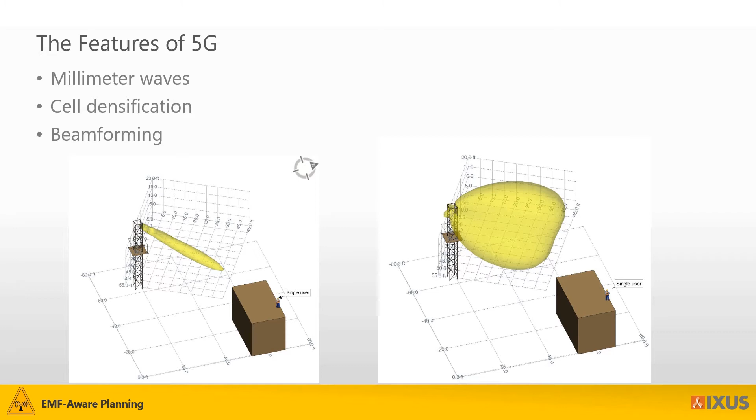At IXUS, we have an antenna service providing models of the highest possible quality. We have a team of antenna engineers specialized in the creation of antenna models. We use data sheets, pattern files, or any available information. Antenna models are reviewed and verified using a formal traceable process. Every version of our antennas published to our antenna database has a verification document available.

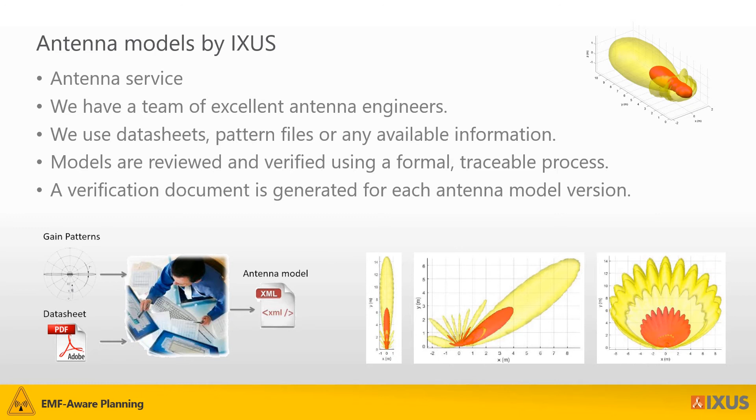5G antenna modeling has received special attention the last few years to ensure we capture the dynamic beamforming nature of these antennas accurately. Our IXUS antenna engineers use traffic envelope data patterns obtained from manufacturers together with a ray tracing approach to produce a model that accurately captures the beamforming nature, as shown on the bottom right.

Something to note here is that we can also model a particular beam set or configuration of the 5G antenna if needed. Incorporating specific power scaling settings is possible, and an example will be shown later on.

Exposure-aware design. How do you make sure your future sites are compliant? You add the compliance step into your workflow and as early as possible. If you are responsible for the compliance of the base station, you need to make sure that you gather enough information early on.

What is the most important thing to remember when planning where to install your 5G antennas? We recommend that you don't intrinsically assume that your base station would be compliant when installing beamforming antennas at the same height as other antennas, especially if the zones were already close to being over the limit.

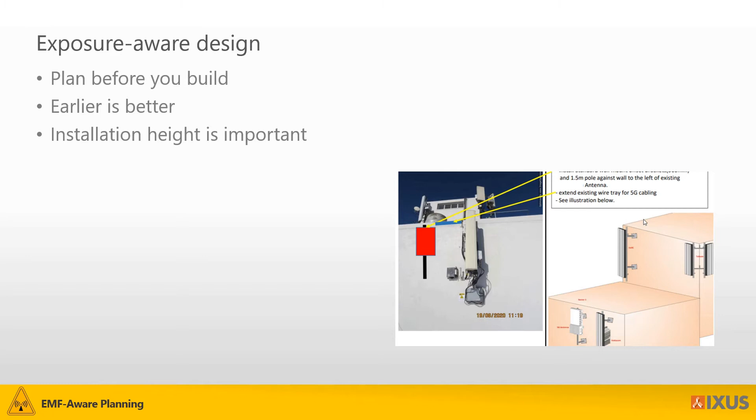In order to explain why this is important, first you need to understand one basic concept in EMF. The ICNIRP guidelines, FCC OET 65, Safety Code 6, and most other guidelines have two limits. The ICNIRP guidelines refers to general public and occupational limits.

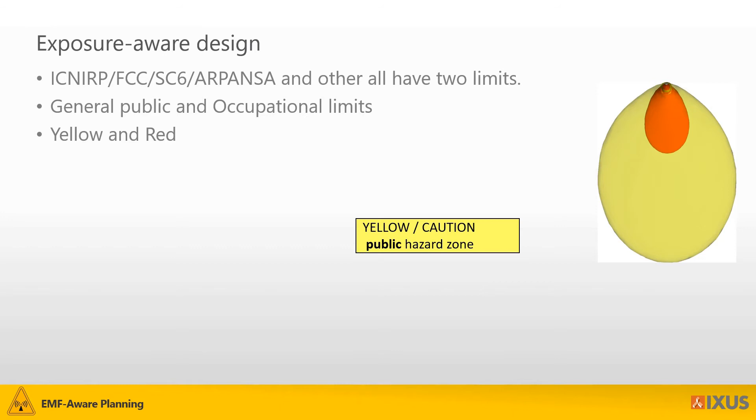In our 3D representations of these limits, or hazard zones, we use two main colors, yellow and red. Yellow equals 100% of the general public exclusion zone limit. Red equals 100% of the occupational exclusion zone limit.

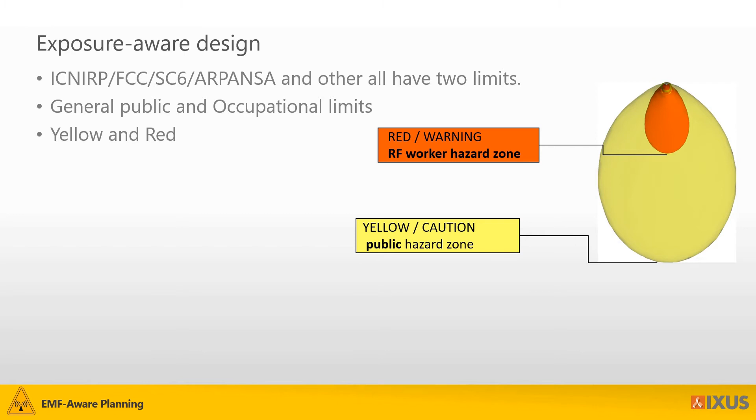Consider a tri-band panel antenna. We can see from different angles where the problematic areas are. The public RF hazard zone extends out several meters in front of the antenna and extends much further than the occupational hazard zone. For the current input power, we see that the lowest point of the zone is 0.7 meters, or just over 2 feet, below the bottom of the antenna radome.

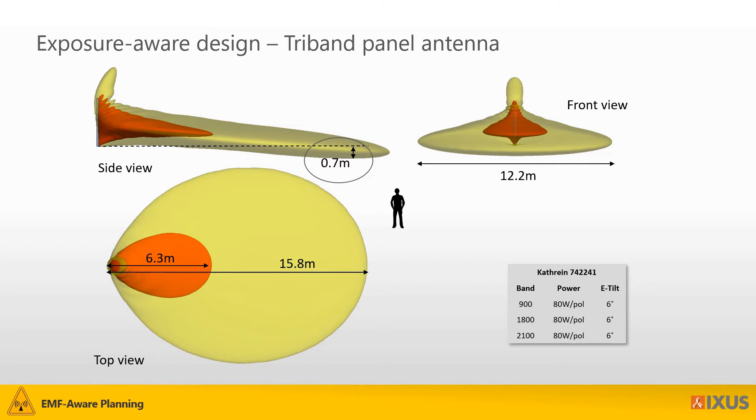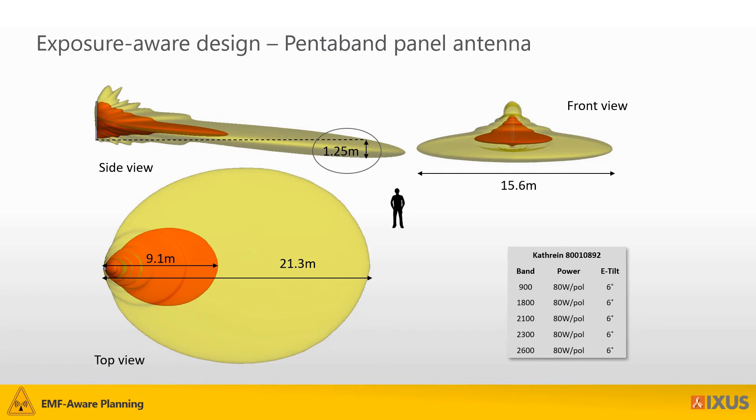Next, we look at a pentaband panel antenna with standard input power. This time the lowest point is 1.25 meters, or 4 feet below the bottom of the radome, as indicated. When we consider the beamforming antenna, also with standard input power, the lowest point of our zone is over 4 meters, or 13 feet below the bottom of the radome. This is due to the vertical scanning beam steering capabilities of most 5G antennas.

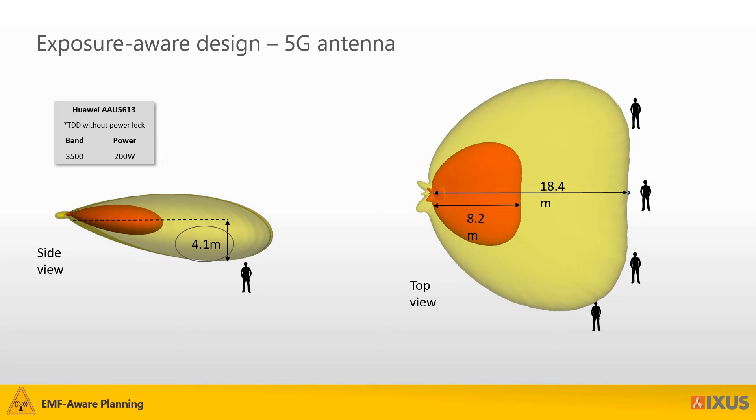Let's look at an example. So consider a pole-mounted installation with a single panel antenna, a very small little base station. The spatially averaged values at the accessible area where the person is standing was calculated. The maximum is found to be 4.841% of the public limits. So this is with only the 4G antenna.

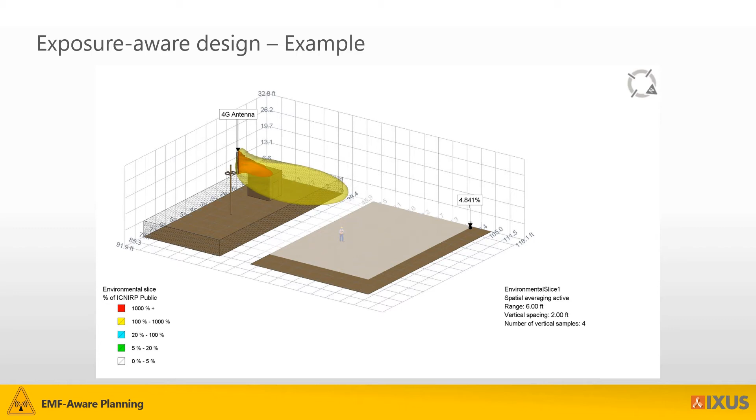In this case, the power level of the 5G antenna is just 25% of the previous slide, which might represent the inclusion of a duty cycle associated with duplexing technology such as TDD. The maximum spatially averaged value is now much lower at just 33.52%. Depending on your local compliance rules, this should be labeled as compliant.

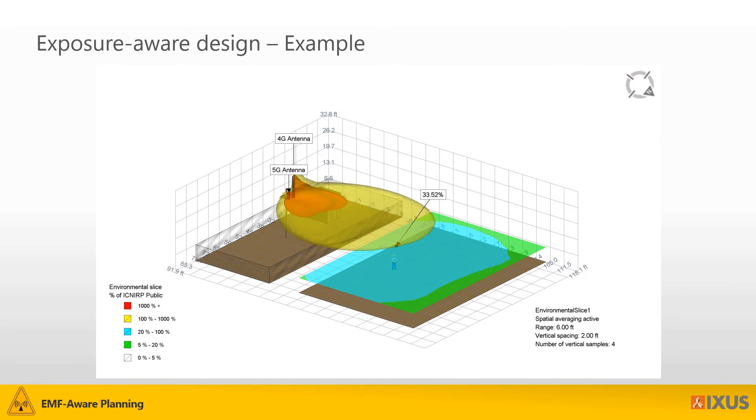For this, let's call it more realistic example, to see the influence the 5G antenna has on the zone, you have to see the side view. As indicated here, the area of concern is close to the antenna, reaching much lower than the non-beamforming models.

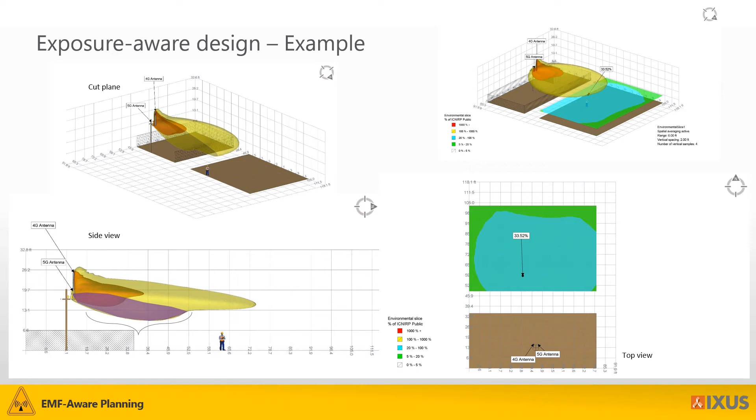Case studies and examples. In order to really understand the value of this tool, it makes the most sense to see what it can do in real life. We'll look at a rooftop site with a very obvious problem. Then we'll show some examples of small cell sites. Thereafter, we will show you a practical example and demo of how the tool is used for a problematic tower.

This first example very clearly shows that installing your 5G antennas at the same height as your current antennas is usually a bad idea. You can clearly see that the percentage of the standard is exceeded where the public has access. In this specific case, the site had to be powered down and the antennas had to be moved. If the radio planner had spent a small amount of effort using our tool, this would never have happened.

Because this was a problem linked to the rollout project, the funds for resolving the issue had to come from capital expenditure. Luckily, moving the antenna higher up on the same offset bracket was all that was needed. But going over budget on a site like this can easily be avoided.

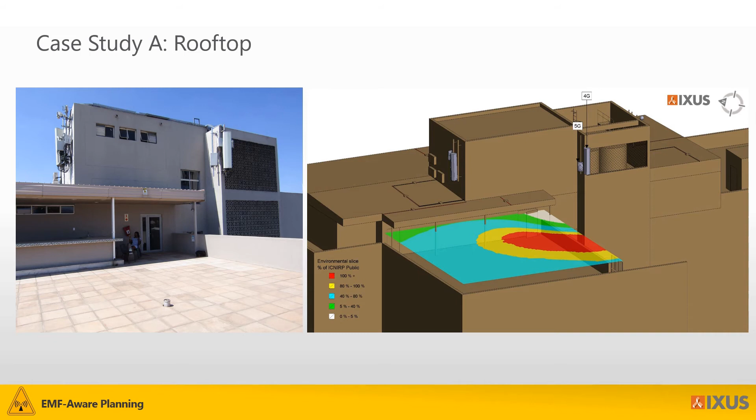This might not be your standard small cell, but in some countries this is regarded as a small cell base station site. We mentioned densification earlier. This is to show that smaller base station antennas can be simulated in IXUS with no issues.

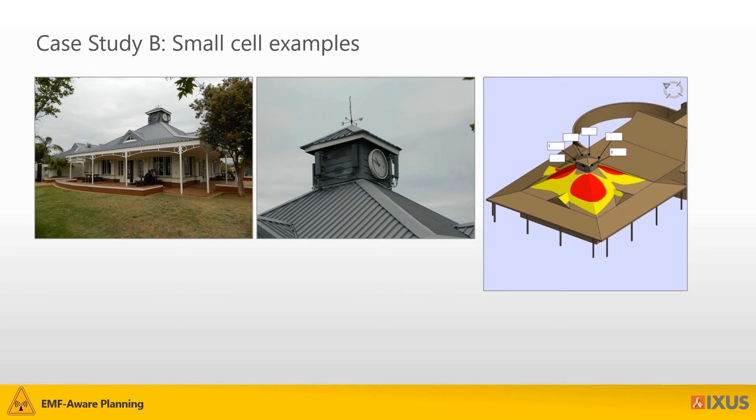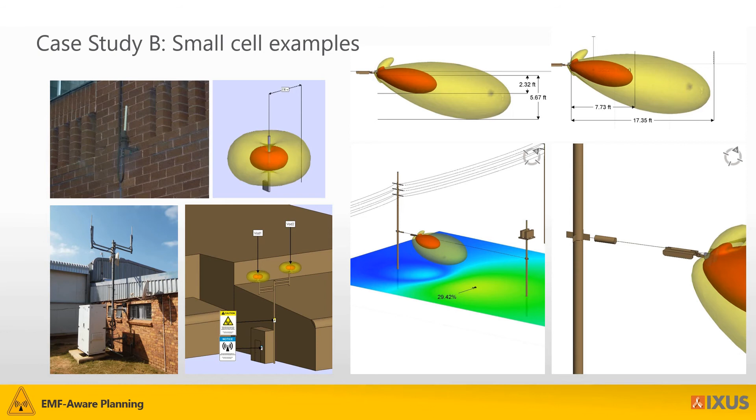In our view, the term small cell refers to single sector sites with less transmitted power. On the left, you'll see some smaller installations using omnidirectional antennas. We've also done some simulations for these new strand mount installations that are getting more and more popular in the US. These are also examples of so-called small cells.

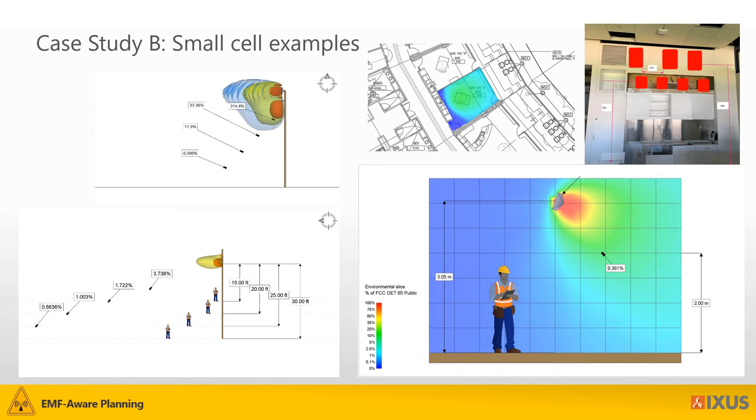So let's go through the demo, and then we can answer all of the questions that you might have. So this tower, case study C, is also an actual site that was built incorrectly. So to explain that, I just need to open something here. Let's have a look at the scope of works. I removed everything that could be sensitive information, but what you can get from this is someone decided to place the 5G antennas below with the rest of the antennas where there were open spaces.

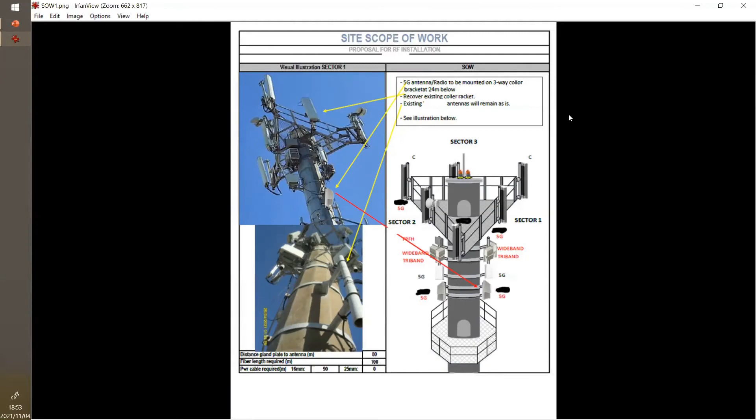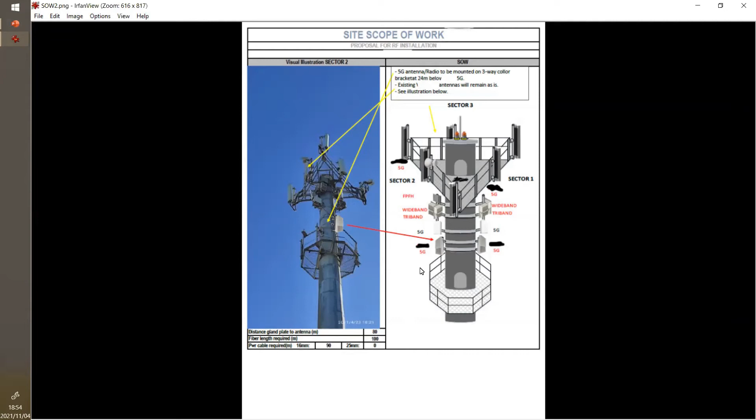Some other views of the scope of work looked like this. Not a lot of effort was put in here with the planning, I guess, but you get the idea that someone decided we will add the antennas at the bottom because there's an open space. In our tool, I've already opened this base station. And before I continue, let me just hide these lobe imprints to give you a better idea.

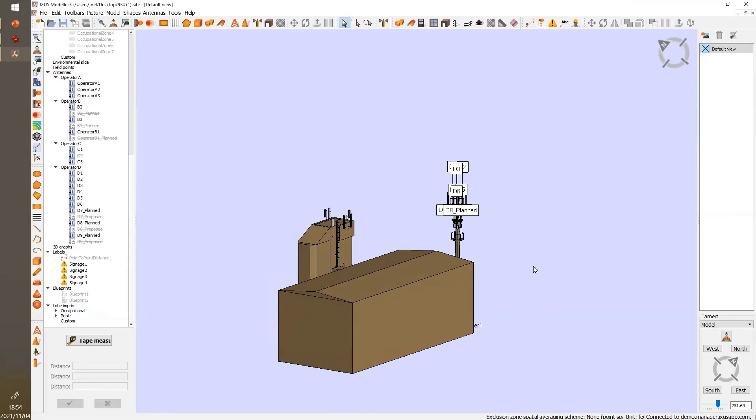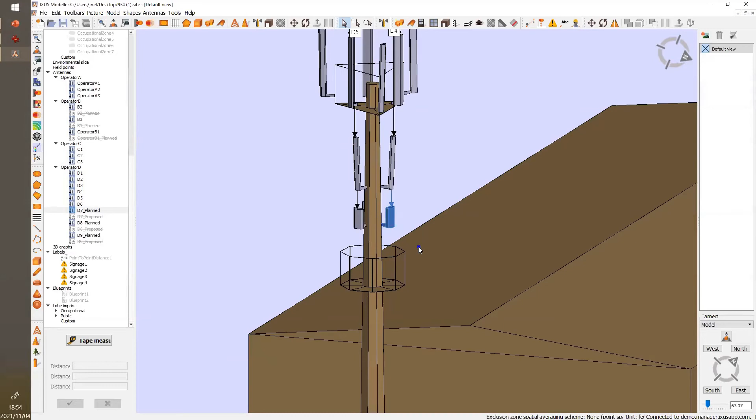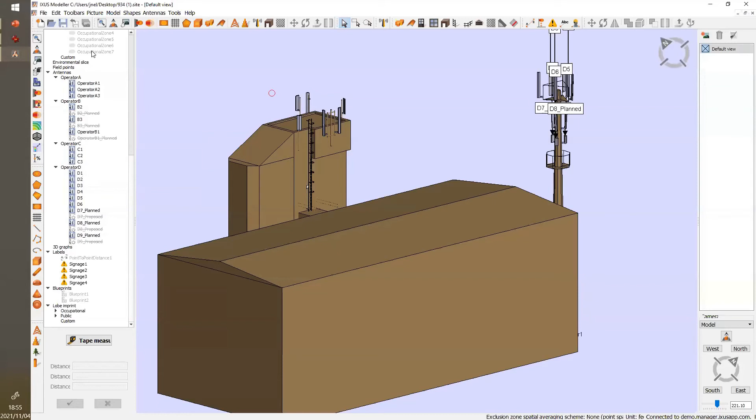So this is more than one operator. There's actually 4 operators. The operator whose scope of work document I just showed you has decided to place these antennas below, just above the crow's nest, as shown there. It is possible to walk around on this rooftop, and these are antennas of another operator. So what we want to know is, is it compliant for them if they install the antennas over here? So that's why we have underscore planned, which means this is where they decided to do the installation.

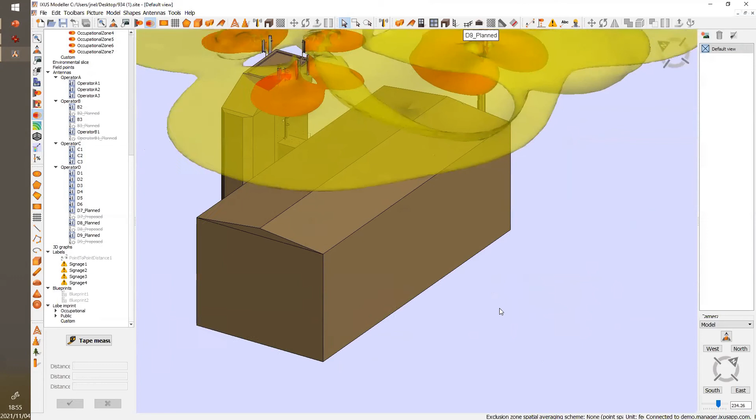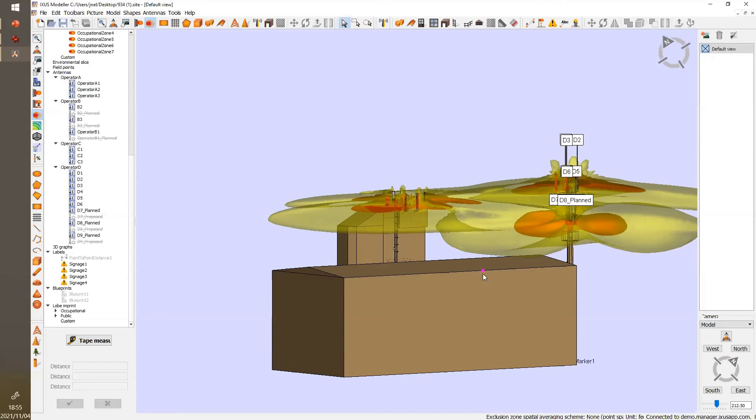So if I run this, well, this simulation is already run, but if I put on the plumes, you can see clearly at the bottom here that this 5G plume goes all the way down to this rooftop. Now, this is not very useful. It looks nice, and you can see where all of the power is emitted, but to really see where the accessible areas are, we use our lobe imprint functionality, which means if this zone is less than 6 foot above this roof, then it should make the roof a certain color, like for instance, yellow. So I'll just show these lobe imprints and then hide the plumes again.

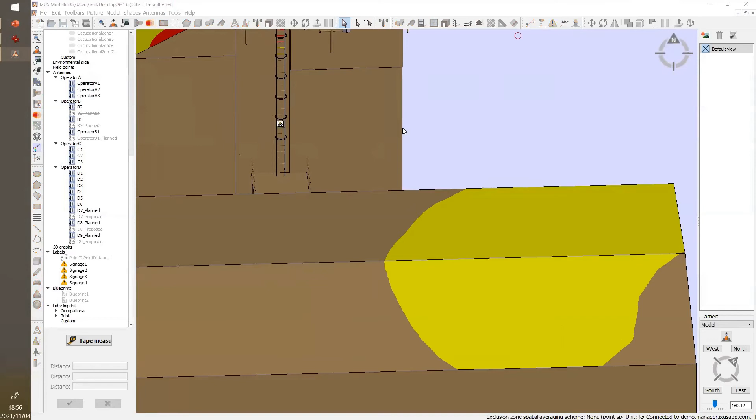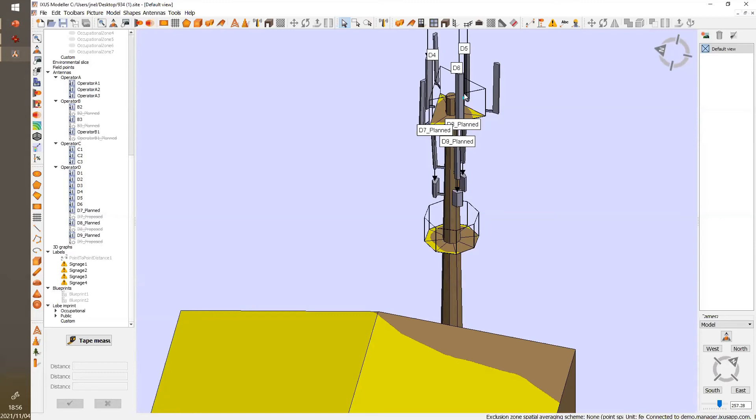So what you see over here is accessible areas. In other words, if someone would climb up, so I'll take my little guy here, if this guy would walk around, the moment he goes over this yellow line, he will be overexposed. Now, how do we resolve this problem? Well, you can probably move the antennas over there, but I would say if the wind loading permits it, it would be better just to move them up to the top. So that is exactly what we proposed.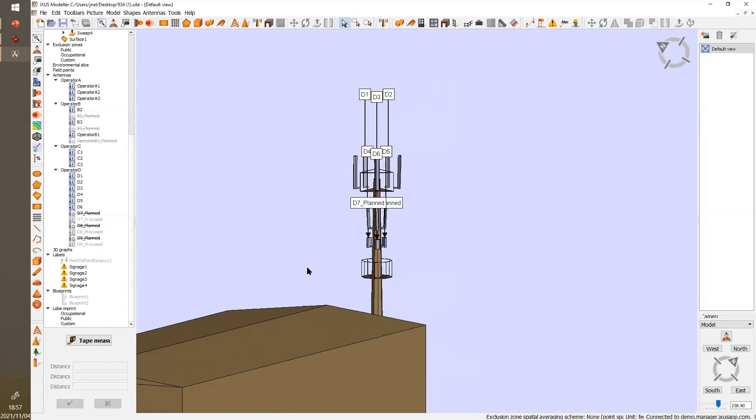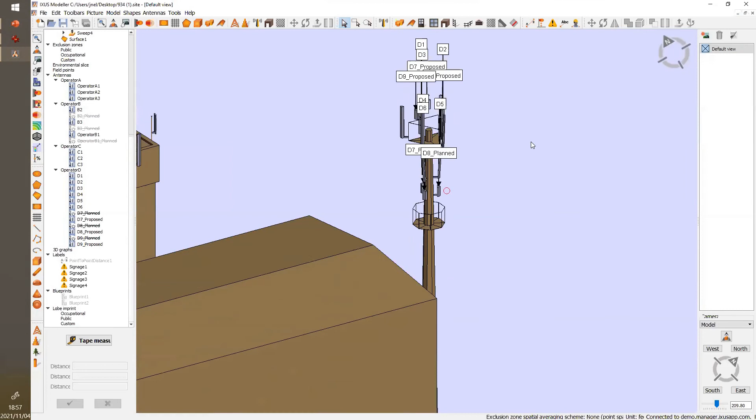So in this case, I will disable the planned ones and enable the proposed ones, like I'm doing now. And then we run the simulation again. So then again, let me just also show them. So now the proposed positions are here at the top. It looks like they're floating in the air, but I'm sure there's a bracket there. All right, so in this case, the proposal was to move the antennas to the top.

And now it's very easy. Now we can just check if it is compliant or not. So we'll do the simulation again. We'll run the simulation using ICNIRP. And it's taking into account all the emitters on the entire base station. And then we'll see if the site's compliant or not.

Why is it taking so long? It's because it's a demonstration. It always takes long when it's a demonstration. This morning that was a lot quicker on my colleague's computer.

Maybe while we wait for it, I can highlight a few additional things while we're looking at this. So what happens here when we run the simulation? We make a tetrahedral mesh of the volume around the area here. And then we calculate the electromagnetic field at any point on that mesh. And then we systematically grow that tetrahedral mesh outwards and refine it as we go along.

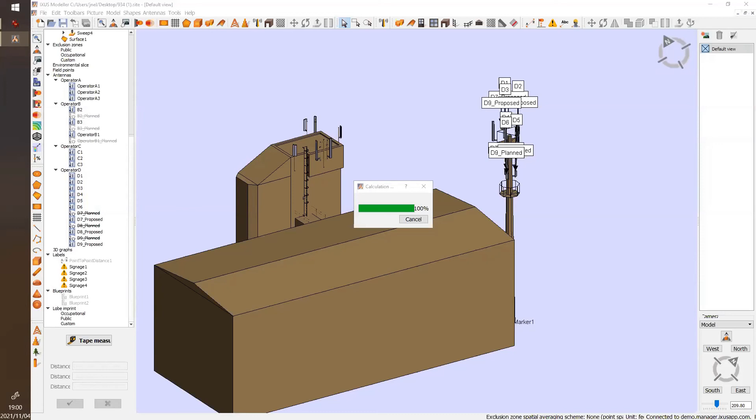So it's a form of adaptive meshing, we call it, to cleverly obtain where the exclusion zone that you're seeing now here is. So we don't discretize the entire volume very finely and calculate it. We have an adaptive mesh technology. And what we also include there is a form of optimization.

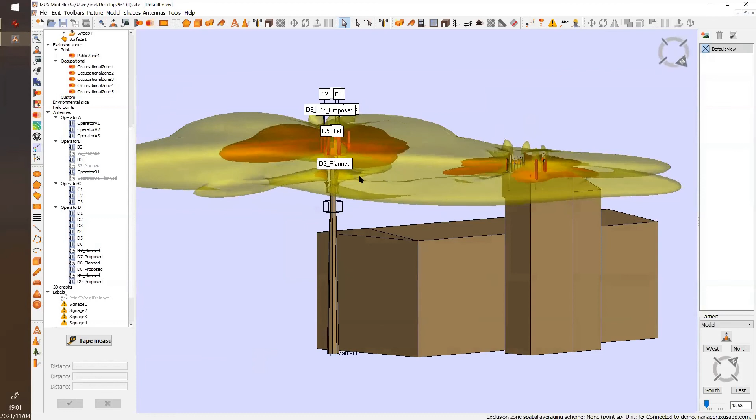I think in this particular case, what takes a long time is the fact that you have quite a few radiating antennas there. There's almost 10 or 11 at various power levels. So the power level of the antenna also determines how far this three-dimensional exclusion zone is.

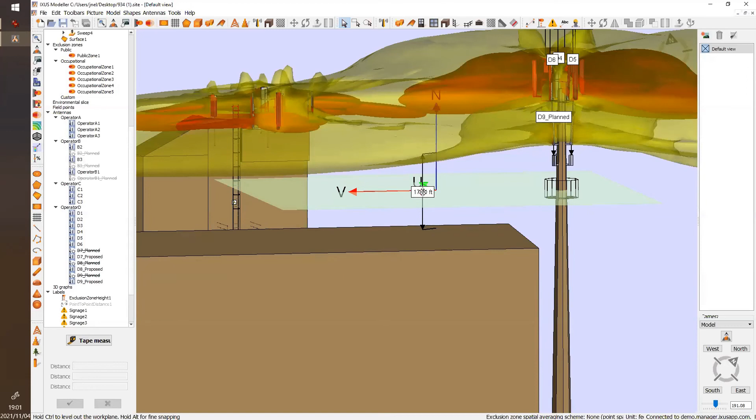But it's all things that we are also continually optimizing with our IXUS releases. We have about 2 releases a year. In our next release, we've got some GPU acceleration planned as well. But yeah, I'll hand over to Johan again, seeing that we've got the results here.

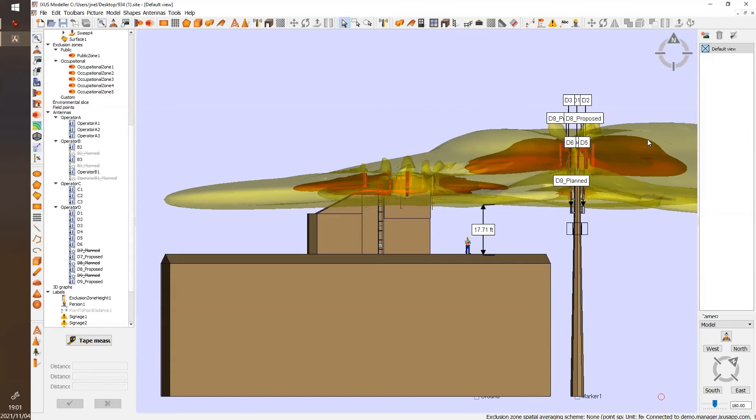Yes, so all I can mention is that very clearly our problem is solved. The 5G antennas are at the top, and this guy is completely safe standing here on the roof. I don't know why he would be standing there, but he's very safe now.

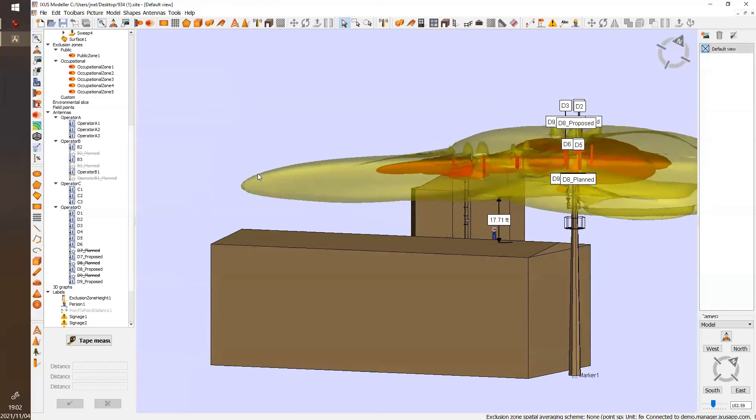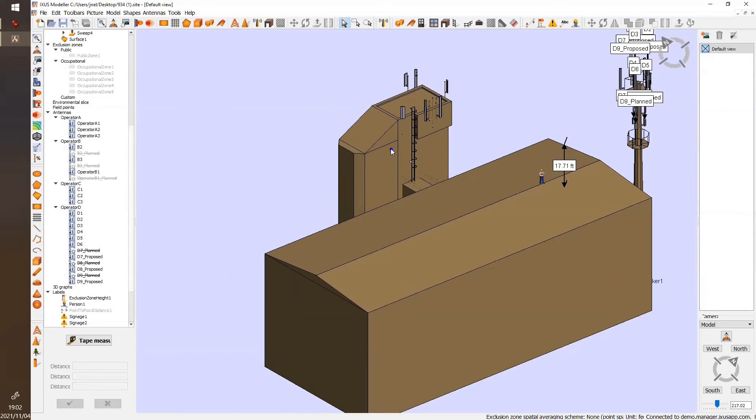Just to give you a little bit of an idea: if you look at these plumes, it's sort of difficult to work with. If you put it in a report, a lot of people don't understand it, or they have difficulty understanding the 3D aspects of what we were showing them. Those lobe imprints that I showed earlier are very useful, but that's more useful for us to know where the accessible areas are.

If you want to show something to the public, it's a much better idea to add something like this. So let's add an environmental slice over here, and then I'll put it on 6 foot. You can't see the settings now, it's in my other screen, but I just want to show you the results.

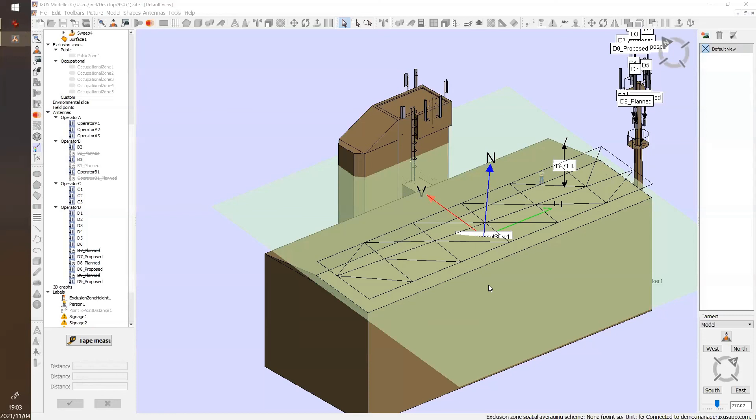So if I calculate the limits on this plane, then you can see it looks like that. Now in this case, if I put on the legend, you can see 0 to 5 is this white area. And then from 5 to 20 is this green area, and then below 100 is there.

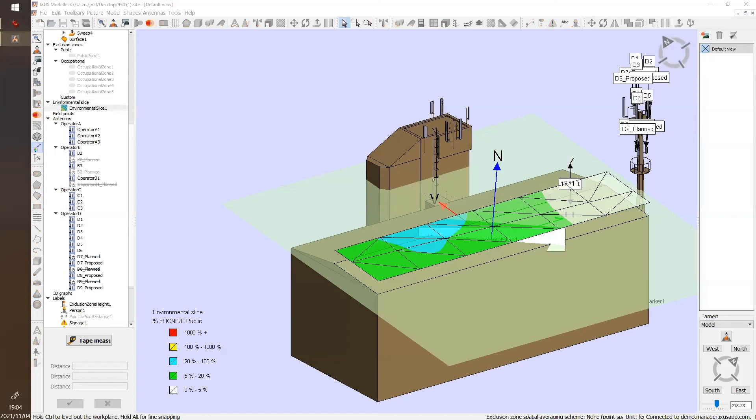So the maximum is still over here somewhere. If I switch on the maximum, then I'll probably see it pointing to a point over there. So there is the maximum for percentage of ICNIRP public. 24.85% over there is the maximum on this rooftop, according to our calculations.

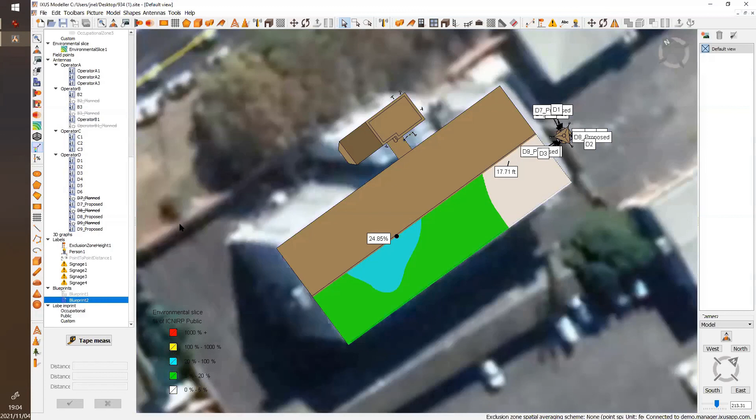So if you show something like this to people, it's easier for them to understand. You can even just hide the geometry in this case, and add like a Google Earth picture to show them where the areas are if they don't understand the 3D model. There's lots of ways that you can show where the areas are.

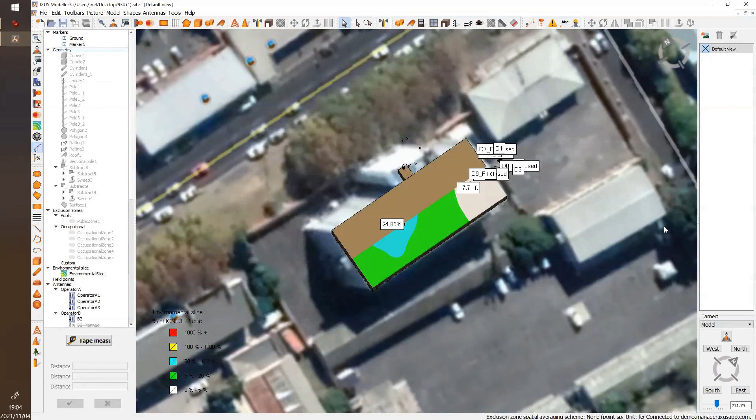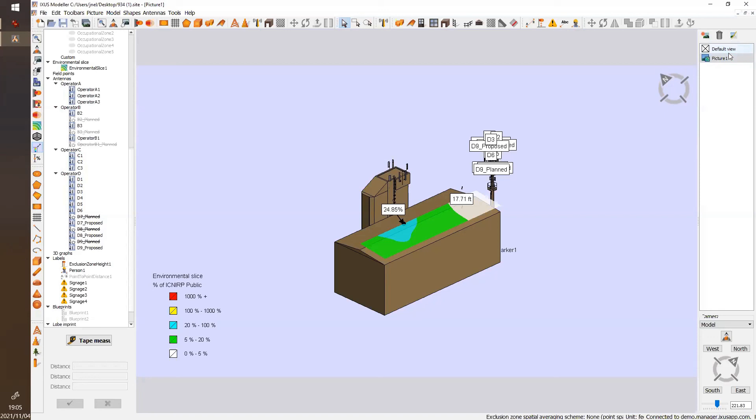Okay, so I think that solves our problem. In this case, what we would do next is, firstly, on the right-hand side, we'll create some pictures. It's almost like in other CAD programs, you get these tabs of different views, but we created pictures like this. It's also something that you can move around, and you can add comments and dimensioning and whatever you need to do.

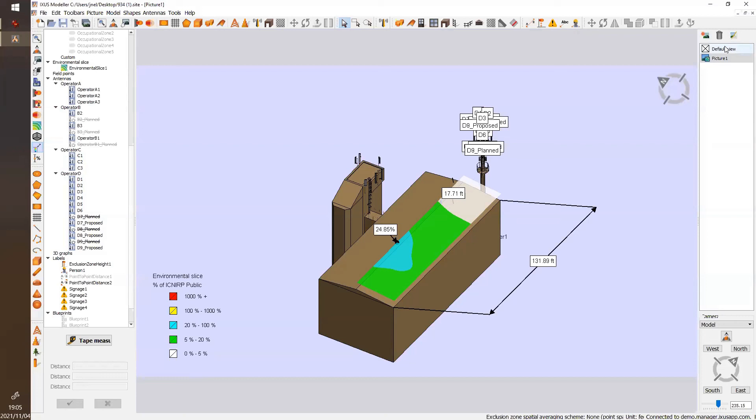So if I want to add the length of the building, for instance, I can add that, and this directly goes into the report. Anything that comes up in this area goes into the report automatically. And my default view is still there. So going forward, you would create pictures, export, and from there automatically generate the report. Okay, so let's go back to our slides.

And in terms of compliance, beamforming is the only influencing factor that discerns 5G from previous generations. Adding your compliance step early in the workflow saves money, and you have to keep an eye on the mounting heights of your 5G antennas.